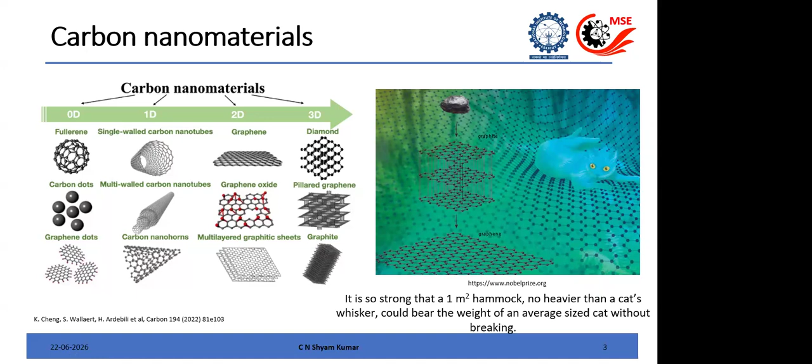We have heard about carbon nanotubes, we have heard about graphene, and then you have quantum dots. Then come the different allotropes and different forms of carbon.

Just one more thing regarding graphene before I go to the main topic. This is one of the very simple experiments that might have resulted into a Nobel Prize. They just used a Scotch tape, our normal cello tape, and a piece of graphite. The idea was that because you have the van der Waals force between the two layers, if we keep on exfoliating, we should finally end up with a single layer of graphene.

Even though there are now different ways to produce single layer graphene, like CVD, where you take a copper substrate and do chemical vapor deposition to make a single layer graphene, still for experimental purposes, people use a Scotch tape and a thick graphite flake to make graphene and do electronic measurements on that.

In fact, I had a friend who used to say, okay, my consumables are over, I need to go to a stationery shop to buy a Scotch tape. She keeps on exfoliating, and then finally transfers it to the silicon dioxide, and then they make contacts and do electrical measurements.

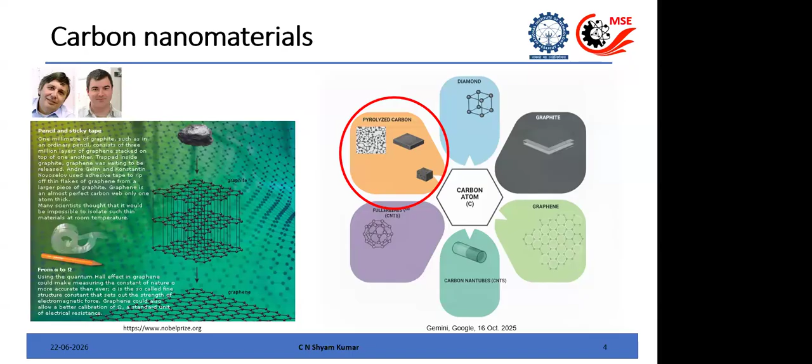Pyrolyzed carbon is now into different technological applications. It's widely used in a variety of applications like electrode materials in batteries and supercapacitors. If you know, the lithium-ion battery uses graphite.

But when it comes to post-lithium-ion batteries like sodium or potassium, the graphitic layers cannot host the bigger potassium and sodium ions. So there you need a material which is not ideally having the exact graphitic layer thickness, which is 3.34 angstrom. So you need to have a bit of disorder there, so that the layers are not perfectly graphitic, and you have more space between the layers, so that the bigger atoms can go.

This is where actually the hard carbon, they call it - it is also a pyrolyzed carbon. So hard carbon electrodes are used in battery applications, supercapacitors, and other things.

And catalyst support for chemical reactions - these are highly porous, so you have more active sites for chemical reaction, water and air purification. They're also used as reinforcements in composites, both polymer composite as well as metallic composites. This is actually biocompatible, so you can use it as implants and coatings for implants, and sensors, biosensors, drug delivery, and also thermal and corrosion resistant coatings. So there are a wide variety of technological applications where you can use this pyrolyzed carbon.

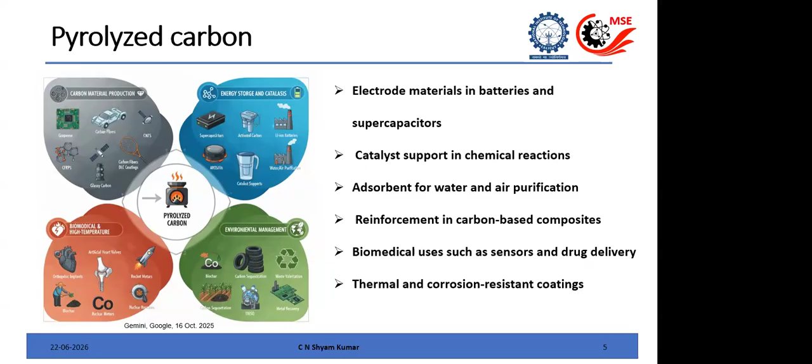And one of the advantages that makes it so popular is that you have the possibility to tune the microstructure, you have the possibility to tune the morphology, and thus you have control over the properties. So basically, you can think of a property-specific material tuned for specific applications.

So what is this pyrolysis, and what is the difference between normal burning? Because if you burn something, you also make carbon, right? But what is the difference here? Pyrolysis is basically heating without oxygen - you heat it in an inert atmosphere, or you heat it in vacuum. But when you normally burn it, you make carbon which is mostly amorphous, sp3 hybridized, and the graphitic content, that is sp2 content, is very low.

And some of the properties such as electrical conductivity, thermal conductivity, and other things are because of the sp2 nature. So you will lose all those things. And the yield is very low because you lose everything - carbon and oxygen are very good friends, so they make CO2, CO, and other volatiles will go if there is oxygen. So your yield is very low.

But in the case of pyrolysis in an inert atmosphere or in high vacuum, the carbon won't go as carbon dioxide or carbon monoxide because there is no oxygen. And if you have a precursor material with aromatic structure, these structures can freeze and form as the building block for sp2 carbon. Because if you remove all the other volatiles, the carbon ring will freeze, and these carbon rings are the building blocks for the sp2 carbon.

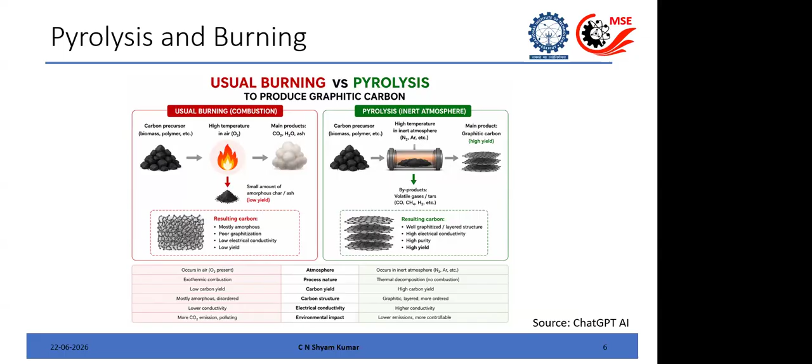So basically, you have more sp2 content. Because of that, you have enhanced conductivity. And since it is sp2, you will have a layered structure - it is not completely like graphite, we will discuss this. And the yield is high because the carbon is not going - carbon as such will stay, and the other volatiles will go. That's true, but carbon will be there, and it's more controllable - so you have the possibility to control the microstructure and morphology. So basically, yeah, this is how it happens.

It is a thermochemical decomposition, and after the initial removal of volatiles, we will see a carbonaceous backbone forming. This carbonaceous backbone means there will be some aromatic rings, or sp2 rings, which come from the aromatic molecules.

There will also be disordered carbon present. So it's a mixture in the initial stages, a mixture of sp3 and sp2 carbon with low sp2 content. As temperature increases, sp2 is a more stable form of carbon, so there will be a conversion from sp3 to sp2, and an extension of the sp2 network.

These carbons are basically called non-graphitizing carbons, in the sense that they won't finally form a layered graphite even at very high temperature, because of the initial misorientations. The layers won't completely be flat and form graphite.

There are some precursors which, if heated to very high temperature, finally end up as graphite. But in this case, it won't end up as graphite, though it will be graphitic. There's a slight difference: graphitic means it will be completely sp2, with no sp3 carbon left, but it still won't form graphite. That's why it's called non-graphitizing carbon.

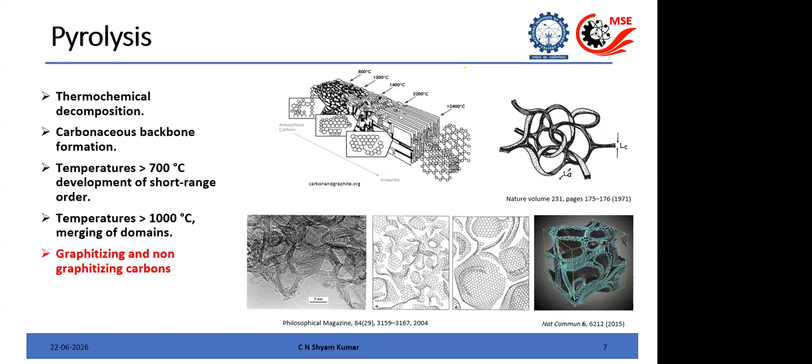As I told you, you can pyrolyze any kind of material. You can take polymers with aromatic molecules and pyrolyze them to form pyrolyzed carbon. There are groups working on engineering the polymer itself to have more graphitic content, using self-assembled monomers and such, so you have more aromatic rings, and finally you can tune the graphitic content.

But here, what we started with is looking into biomass, because biomass inherently is lignocellulose—it contains lignin, cellulose, and hemicellulose. If you take any biomass, these are the basic three constituents, and the amount of each varies. In some cases there's more lignin, in others more cellulose and hemicellulose. When it comes to lignin, lignin is the aromatic structure, so the amount of lignin decides your amount of sp2 content.

As I told you, you can take different kinds of biomass, and there is a lot of work happening in making it into different shapes—spheres, dots, fibers, sheets, hierarchical carbon—and it's being used for a lot of different applications.

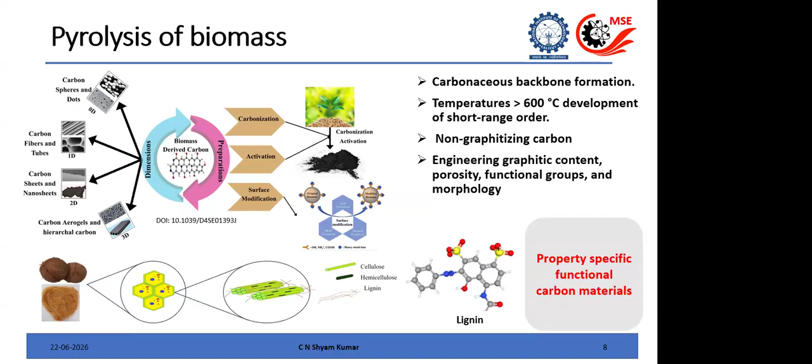So we will briefly look into how these four things can be engineered to achieve different properties, and we will discuss some applications. The whole point of this introduction is just that we have the possibility to create a property-specific functional carbon material.

Now we go to an example we all know well: coconut coir. This coconut coir is one of the lignocellulose biomasses which contains very high lignin content, so you can take that and pyrolyze it. This is an example where we took coconut coir—these are coir, not the fiber, because this is after the retting process. This is what is used for making coir, and some treatment is used to make it bit hard and strong.

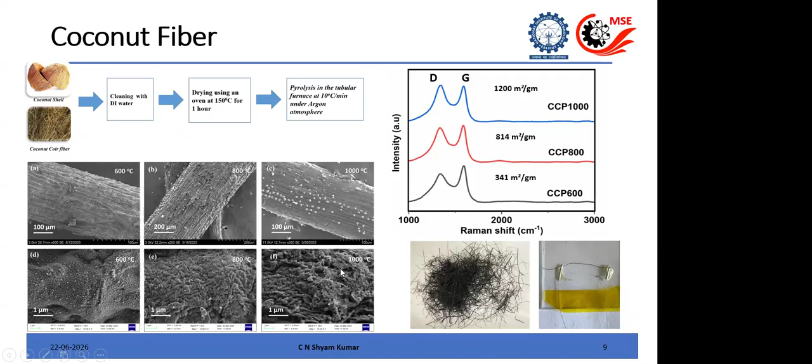Something similar you can observe with the coconut shell. Here also from Raman you can clearly see an increase in the sp2 content as you increase the temperature from 600 to 1000. You can use the D and G band to get an idea about the increase in graphitic content. And from the SEM images, you can see the porosity is increasing. So now, in a way, you have three different microstructures in both samples at 600, 800, and 1000, and the properties will change because of this microstructure and morphology.

Now the question is that, as I told, still at 1000 degrees Celsius you have, I would say, more moderately graphitic carbon. It is not yet completely graphitic. So what should we do? One possibility is that you can increase the temperature. What we want is some more possibility to tune the sp2 content so that we can have a wider window of changing the properties. So how to do that?

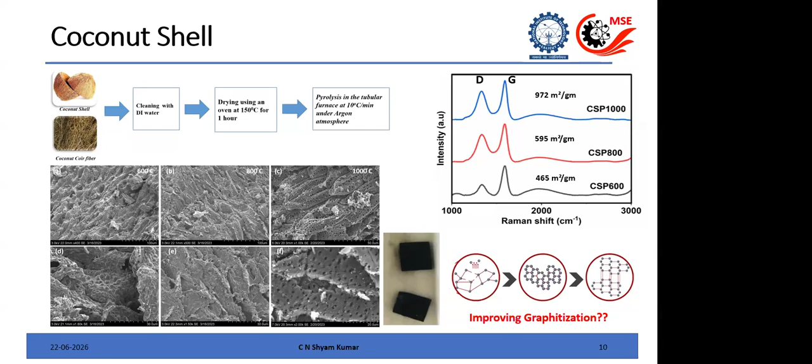So this is what we are trying to do with catalytic graphitization. Another way is that you facilitate the conversion from sp3 to sp2 through a catalyst. That way you can increase the sp2 content so you don't have to go to a very high temperature, and within our furnace itself we can do this. So this is one approach: we try to increase the graphitization by using a single step nickel nitrate solution.

So you dip your coir or even shell in a nickel nitrate solution and allow the material to soak in for maybe 8 hours or so, with continuous stirring. Then you take it out and do a pyrolysis like before. What happens is that now it's not the biomass alone, but you have nickel acting as a catalyst. What we think is that after initial carbonization, carbon acts as a reducing agent, reducing nickel nitrate to nickel, and this nickel then acts as a catalyst to improve the graphitization. Again, from the Raman data, we could understand that the graphitic content has considerably increased now, because you have the 2D peak. So now we have almost completely graphitic carbon, which is very highly conducting and more mechanically stable.

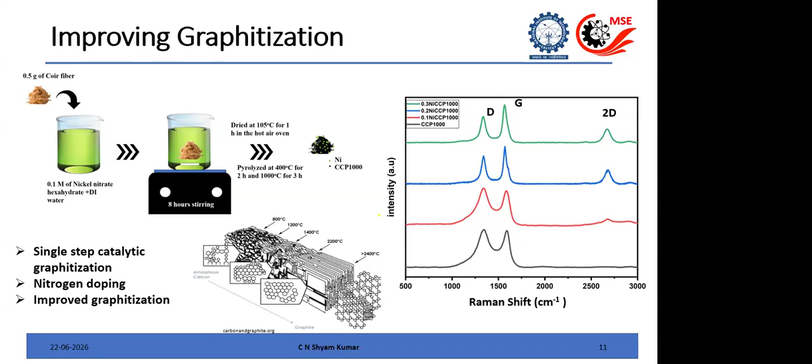And also on top of that, we have a very fine nickel particle dispersed all over the carbon. So basically you have a nickel-carbon composite with a one-step synthesis.

Till now, what we have done is try to increase, with a normal single pyrolysis, the graphite content up to 1000 degrees Celsius. But that is not sufficient all the time, so we use a catalytic method to increase the graphitization. With Raman and XRD, we could understand that it is now highly graphitic.

Now, when it comes to engineering a carbon material to tune the properties, you need a very good understanding of the microstructural evolution, how the internal structure is changing. Most of the characterization we do is actually post-mortem: you take your sample, heat it to 1000 degrees, take it out, and look at it in Raman, SEM, or TEM.

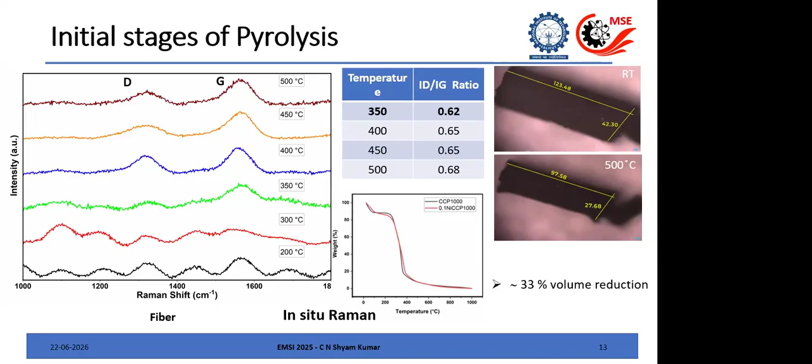You can also look at the shrinkage, because when the volatiles are removing, there will be a change in the size of the sample. You can see the maximum change is happening somewhere between 300 to 350 degrees Celsius, coming down from 120 micrometers to 100 micrometers. So you can correlate this - all these insights will help you tune it better.

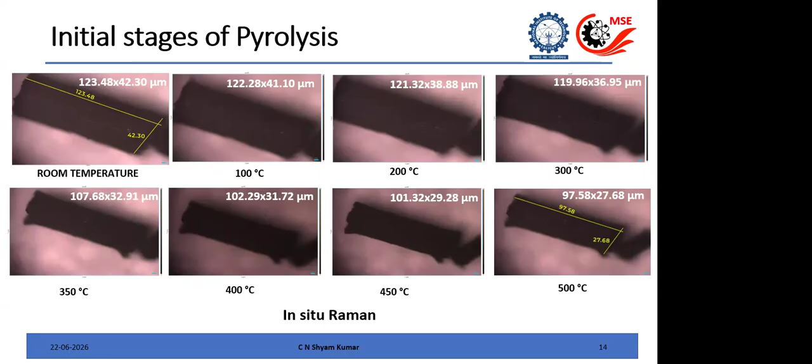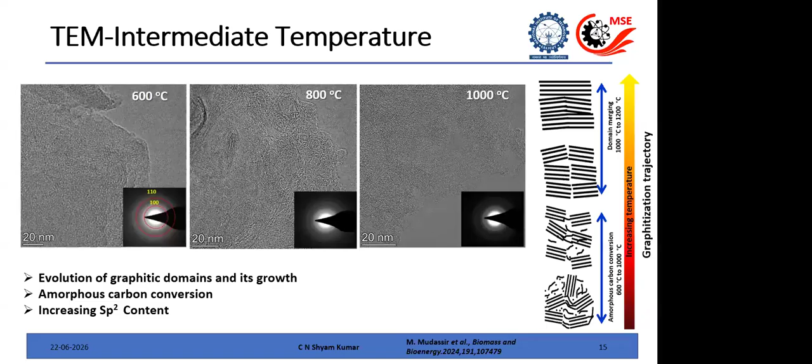So now you know that there is a higher amount of sp2 at 1000 degrees Celsius, and the sample is almost a flaky graphitic structure. So this is okay, just with the normal samples.

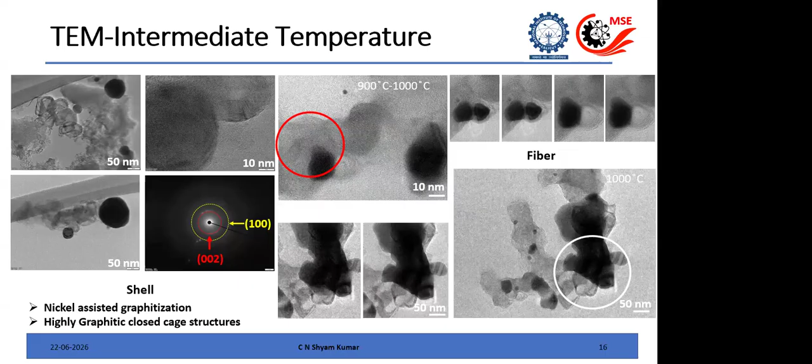Now, with this understanding of the microstructural evolution, we look at three examples of using this biomass-derived carbon for different applications.

So here you also have the possibility to change your biomass, and that can yield another kind of carbon with different morphology, different porosity, different functional groups, as well as different graphitic content. You need to keep in mind that with different biomass, the final carbon will be different.

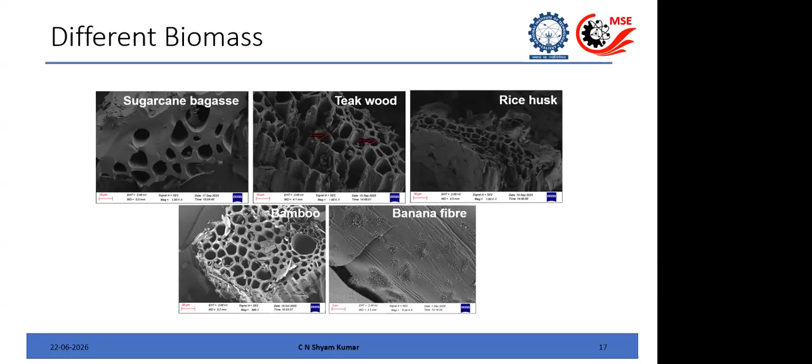Now, examples. So now we move on to properties. This pyrolyzed carbon, which is from the coconut coir, is inherently piezo-resistive, changing its resistance with force. And since these are mechanically stable, we could look into the piezo-resistive property of a single fiber. So this is that example.

And one thing to keep in mind is the trend that we observe: as the pyrolysis temperature is increasing, the piezo-resistive sensitivity is coming down.

That means the sample pyrolyzed at 600 degrees Celsius is more piezo-resistive than the sample pyrolyzed at 1000 degrees Celsius. Even though the graphitic content is increasing, the conductivity is increasing. From Raman, we could see that the graphitic sp2 content is increasing, but the piezo-resistive response is coming down.

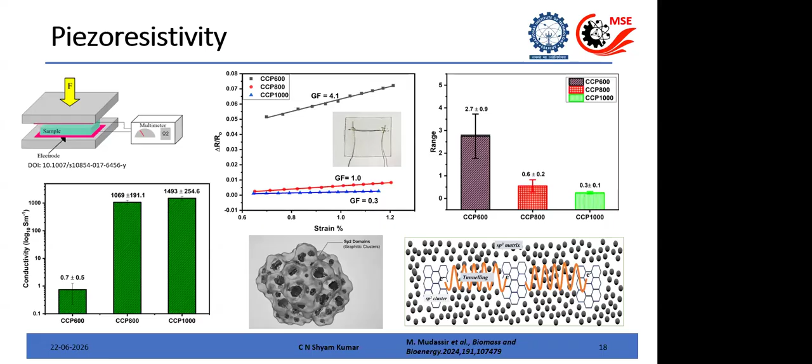Now you can actually make this not as a single fiber. You can powder it and make sensors out of it. What you see in the figure is a small sensor formed by this powder, powdered with a ball mill. This is a very simple design.

You have a substrate, like a PET substrate or some flexible substrate. Then you put a double-sided tape on that. Then you spread this CCP 600, a sample pyrolyzed at 600 degrees Celsius. Then you connect it with two copper wires, and on top you put adhesive to protect the powder.

We use Fevicol, so maybe we can think of something like a 10 rupee sensor. And this sensor works, and the trend is the same. As you use different powders pyrolyzed at different temperatures, you have a decrease in the piezoresistive response. This is actually a prototype which has been working for the last maybe 1.5 years or so.

This means these sensors are durable, and you can use them for motion sensing. It can also sense air flow, and you can use this as touch sensors, movement sensors, and other things, and it is actually durable. It is, I think, more than 10,000 cycles sustained without any changes.

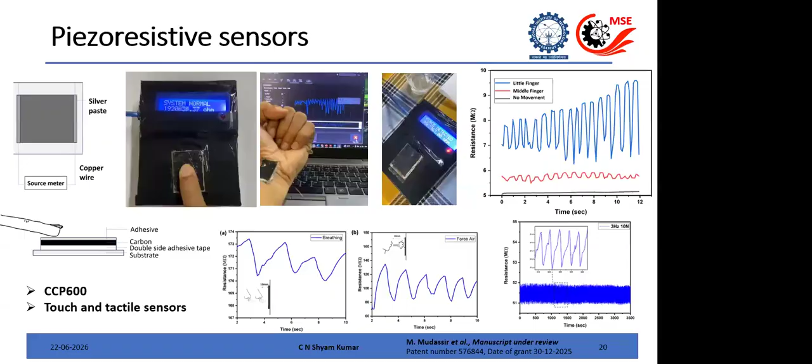So here you can use this powder to make sensors, and you can tune the sensitivity. That is the point - you can tune the gauge factor, which is the sensitivity, by changing the pyrolysis temperature. You might not always want a very highly sensitive sensor. By changing the pyrolysis temperature, you have a change in the piezo-resistive response, and you can have a sensor with tuned sensitivity.

Now this is one thing. Another thing is shielding - EMI shielding. Electromagnetic interference is a big problem, so people are coming up with different materials for electromagnetic shielding. Metals have been used, but the problem with metals is that it is heavy and other things. Another possibility - people started using biomass-derived carbon.

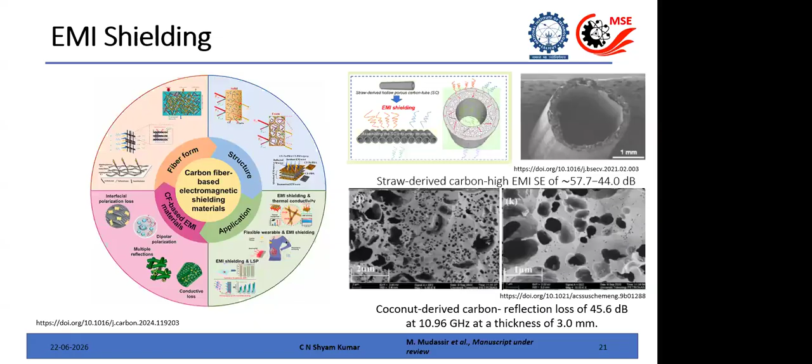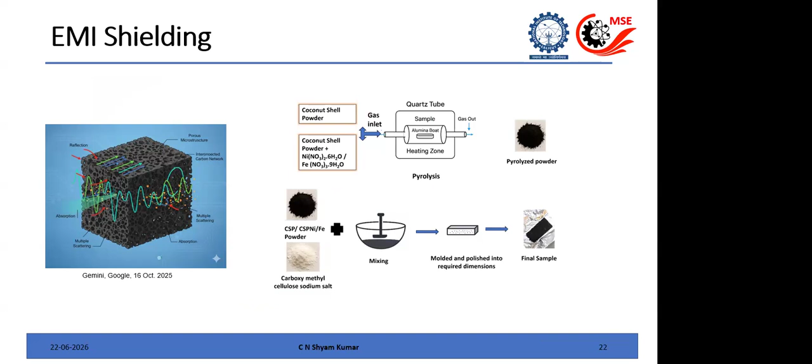There are some works on straw-derived carbon and others. We used coconut shell to see whether it has some inherent electromagnetic shielding. We make small pellets out of it with some binder, and this is the sample which is dispersed with nickel.

So here we increase the graphitic content. We had the non-catalytic samples also, but we also improved the graphitic content by adding both iron nitrate and nickel nitrate. Here the thing is that you are increasing the graphitic content as well as dispersing some nanoparticles, because these kinds of metal nanoparticles will help in enhancing the EMI shielding.

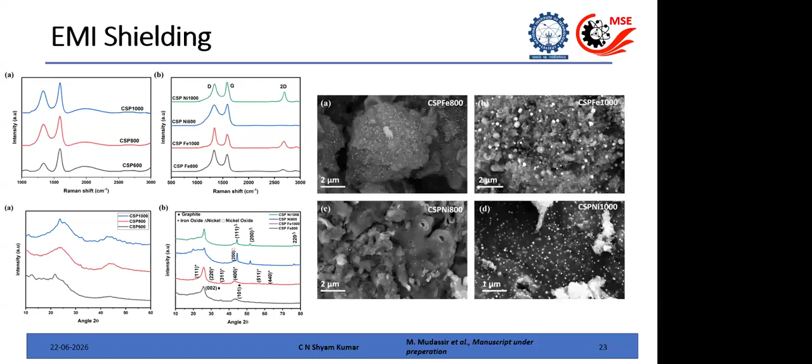And here the trend is reverse. Here, if you increase the graphitization temperature from 600 to 1000, you have an improvement in the EMI shielding, because now it is becoming more conducting, and the porosity is increasing. So you will have local internal reflections and all, which improve the EMI shielding. And if you increase it further with catalyst, you increase the EMI shielding.

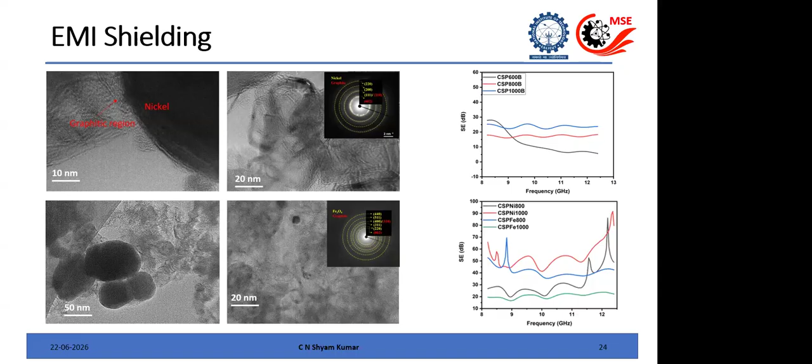Now, one more thing with a slightly different response is a relatively new field called hydrovoltaics. Hydrovoltaics is basically when flowing water is in contact with carbon, there can be an electrical double layer formation. The water interacts with the ions on the surface of the carbon, and there is an ionic movement of ions in the direction of the water flow, along with a movement of electrons through the carbon.

And basically, you can produce power by just flowing water across the carbon. Here, three things are important. One is the surface area of the carbon - more surface area means more interaction and more possibility of forming the double layer. Second is the conductivity of the carbon, because it has to conduct the electrons, so it has to be more conducting. Third is the availability of surface functional groups to interact with the water.

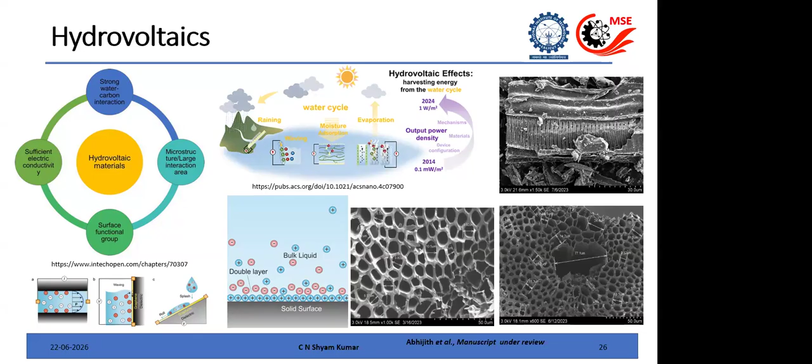So we tried this with coconut coir, because we know that it is highly porous and has a moderate conductivity, not too high, but decent, since we had tested it previously. So we made a sample, which is this next one.

The sample is very simple. You take a tube, fill it with carbon powder, and put a cotton wick below, because the whole thing works like this: the water will evaporate through the carbon powder in the tube, which is filled with carbon, and you put it in water so that the water evaporates through the carbon, creating a flow which produces some voltage and current. This video shows a small sample giving almost 1 volt and about 0.2 milliamps, or 200 microamps of current, with just a small sample and nothing else, simply by evaporation.

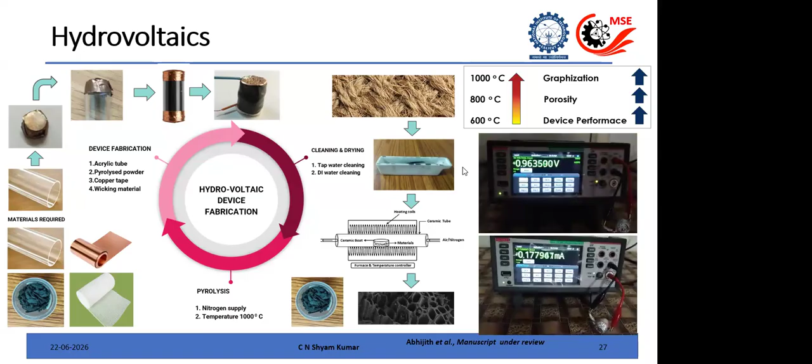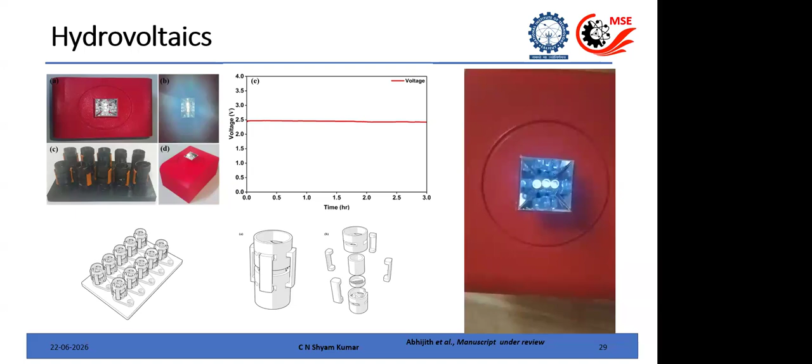Now all these things will just take maybe 5-10 minutes. So this is all what we have seen, how you engineer the carbon with pyrolysis.

Whatever we have seen is conventional pyrolysis, where you just keep it inside and give some inert atmosphere and heat, which is power intensive. So even though the source is biomass and sustainable, the process itself is not sustainable.

So people have started thinking of non-conventional processes to make these kinds of carbons. One is laser induced graphitization, where you use laser to graphitize polymers as well as biomass into highly graphitic carbon within a very short time because it is fast.

There's also something called flash joule heating, where you give very high power and high voltage for a very short time and convert these things into highly graphitic carbon. People have also used microwave pyrolysis, since carbon is microwave active, so you can heat carbon with microwave.

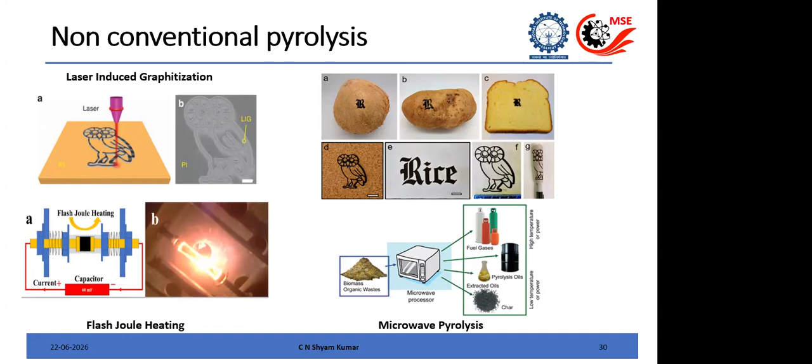Some examples, then I think we'll stop. We actually use this kind of laser module. This is a normal laser engraver that you can buy these days from Amazon and such. You have a laser, and you can graphitize some polymers.

One example is polyimide. You can take this polyimide, which is also called Kapton tape. These are examples of the graphitic carbon which you get with laser graphitization.

The main difference with conventional pyrolysis is that these carbons are highly graphitic because of the photothermal interactions with the laser. This becomes highly graphitic in a very short time.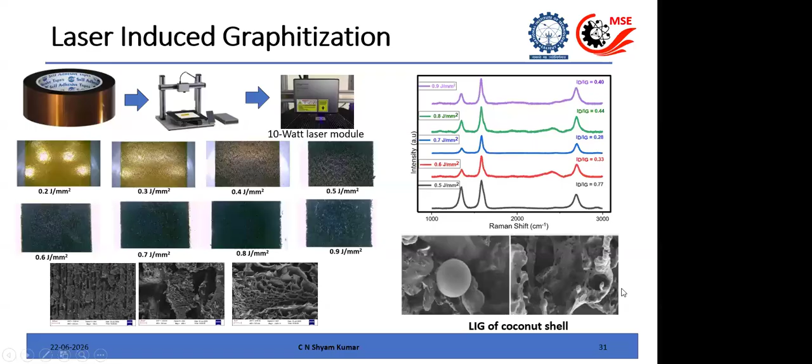You can also do the similar thing with coconut or biomass. There are works on this. One good thing with the laser is that you can selectively graphitize because of the movement, since these systems always come with a movable stage with precision.

I think you might have seen this same technology used to make photos and laser engraved photos. You can put a design and basically carbonize or graphitize, I would say, in a specific pattern that you want.

This is one of the things we do here recently, making all-carbon microheaters. You can graphitize in a specific pattern, and use that, because once the carbon is made, it is conducting, and you can do resistive heating.

As I mentioned, carbon is very stable in inert atmosphere at very high temperature, so you can reach very high temperatures. I think we have crossed even that.

Now these kinds of small heaters reach around 1200 degrees Celsius in inert atmosphere and almost 650 degrees Celsius in open atmosphere.

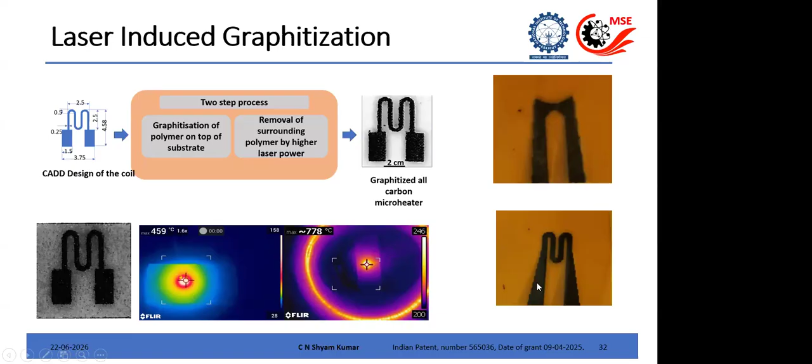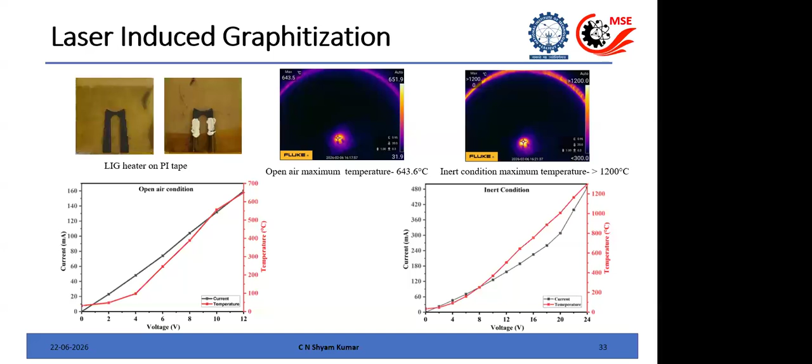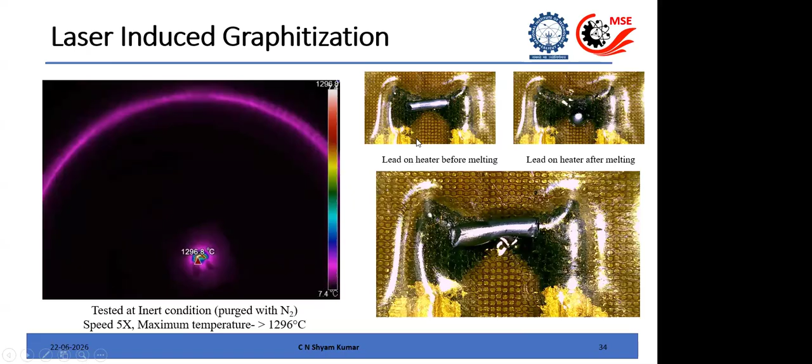This is a video which shows that it is reaching around 1300 degrees Celsius with the thermal camera. This is a lead strip which is on top of the heater, and we can see that the heating is very fast, and then it is melting.

So you have the possibility. I just showed this to let you know about two things. One is that you have non-conventional processes which can be used to make highly graphitic carbon, and one of this is laser-induced graphitization, which can actually precisely pattern polymers, or you can make carbon patterns. That is an interesting thing, and it is fast and precise, so that you can make heaters and others.

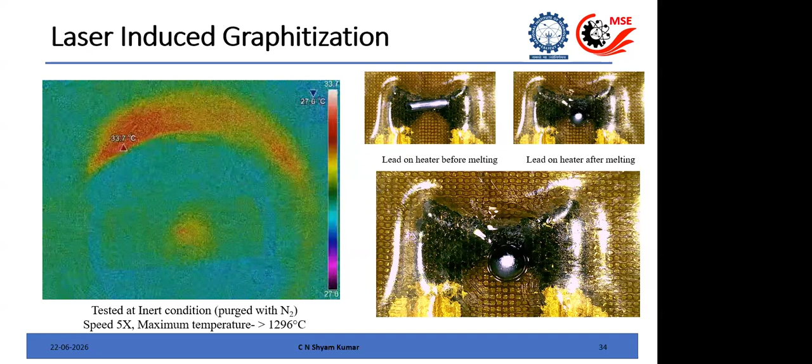And these carbons can be used not only for heaters, but you can actually change the surface properties by changing the laser parameters. So you can see this is a super hydrophobic surface which is formed by laser graphitization, and then you can tune the contact angle by changing the laser parameters.

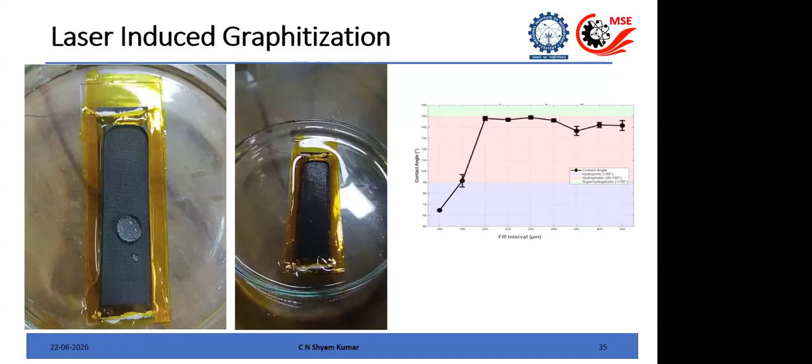Some examples are not only limited to just graphitization, but also you can use it to optimize different properties. I just want to introduce this synthesis also, which is called flash synthesis of graphene. I have a video from Rice University.

So what they do is, are you able to hear the audio? No, sir. Okay, then leave it.

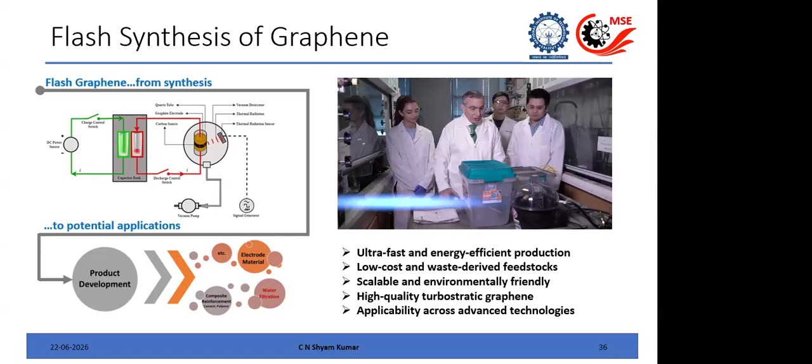So what they do is, they actually take conducting, initially pyrolyzed carbon from any biomass or anything, or mix it with some conducting fillers, and they give very high voltage and very high current for a very short time. So, like in the case of laser, you have a very fast conversion of this organic material to highly graphitic carbon.

I think there is a small video where you can see this is the carbon inside. You can't flash biomass as such, because there should be some kind of conductivity associated with it. So either you mix it with some conductive carbon, or you initially carbonize it to some extent and then do this, and then you can give very high current and voltage.

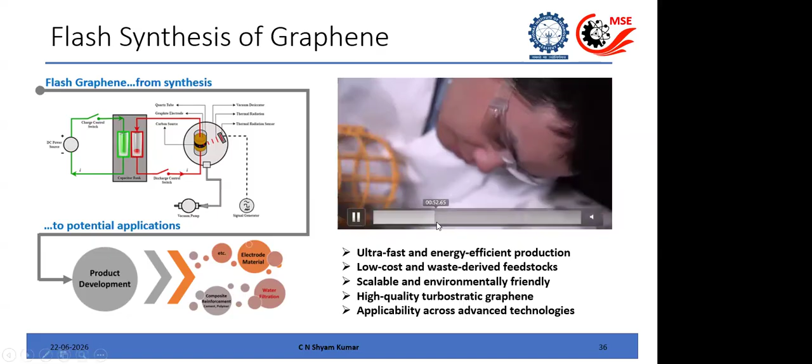And you can see that. So this is why it is called flash synthesis. The good thing is that this carbon is actually highly graphitic.

It's ultra fast, energy efficient production, and very low cost. And you can use basically any kind of waste derived feedstock. It is scalable. You can have gram scale synthesis of moderately good graphene, I would say, because making graphene at gram scale is a really challenging thing.

There are videos where they automate it to make it continuous and all, producing high quality turbostratic graphene. So you can apply it across advanced technologies.

So the last point I just want to convey to you is that it is not only the normal pyrolysis which is being carried out. People are coming up with new ways to convert this waste and biomass.

They have done a lot of things, I think. They have flashed a lot of things about all biomass, human hair, all those things. I think they have tried and assessed the quality of the graphene. But basically, you have processes where you can actually use these kinds of non-conventional pyrolysis to come up with highly graphitic carbon.

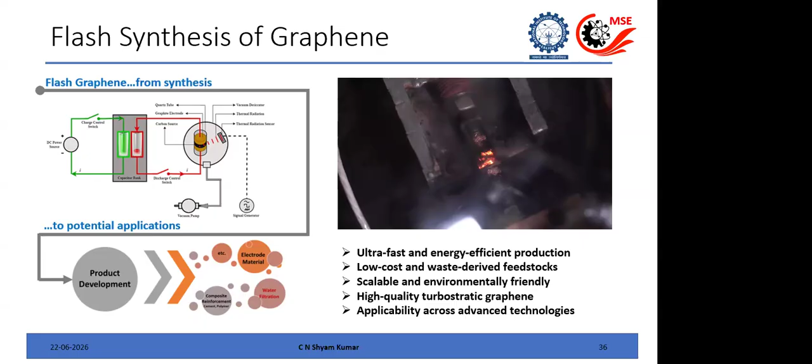Again, these are all tunable. You can tune the properties with the process parameters. You can tune the microstructure with process parameters, and because of that, you can tune the properties with the process parameters. So yeah, I think I'll stop here.

Pyrolysis offers a green circular approach, and pyrolyzed carbon exhibits tunable properties. It can be used in a variety of different applications. But the problem with this is process optimization. So a lot of people started looking into how to make the process more efficient.

As I told you, if you heat your sample in a furnace for 10 hours and then make some carbon, that doesn't make much sense because the whole process is not energy efficient, and the carbon footprint you leave is far more than what you can save by using that carbon in different applications. So you have to start tuning it.

Understanding the process more will help you tune the properties for multi-functional, super performing materials like this turbostratic carbon made from flash, whose properties are very close to graphene, I would say.

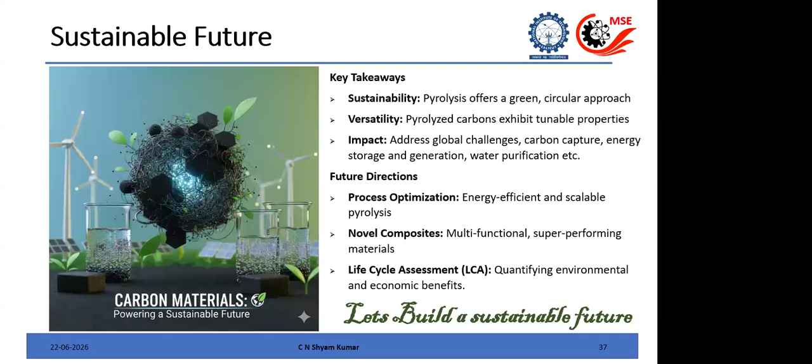We should start seriously thinking about life cycle assessment and quantifying the environmental and economic benefits of this kind of carbon. That will help have some sustainable way to mass produce these things, and hopefully we could see more of this kind of sustainable carbon in the future.

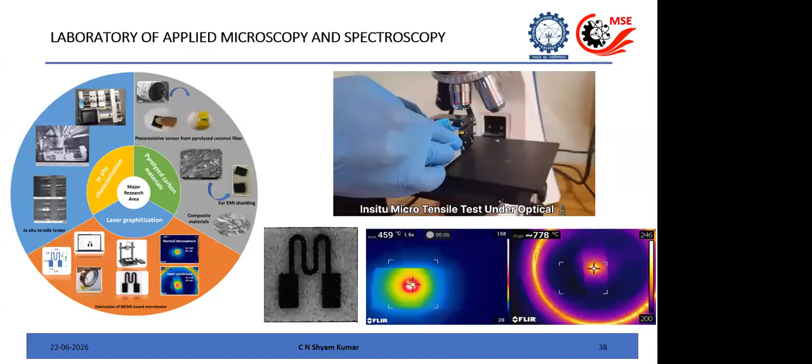Just before we stop, we are from what we call ourselves the Laboratory of Applied Microscopy and Spectroscopy. We do research in carbon as well as some method development. We are always open for any kind of collaborations, and you can visit our lab. You're always welcome, and you can encourage your students to take up internships and all.

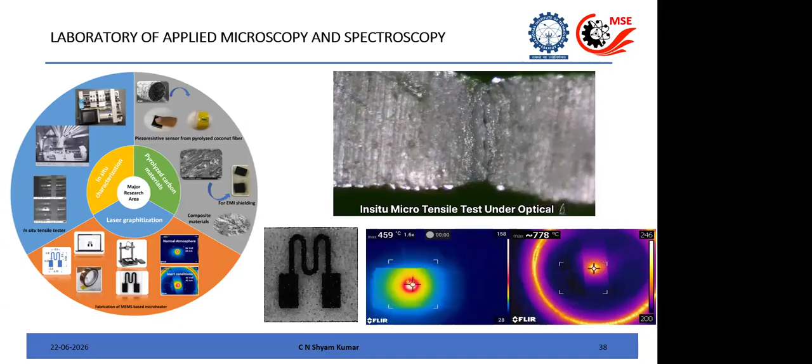NIT has an official internship call every year during this time, through the CCD, and otherwise also we host a lot of very good internship students. You're also welcome. And if you don't know, the material science department has an MTech in material science and engineering, with both gate entry and non-gate entry. If some of your final year students are interested, I think the first phase is over now, but there will definitely be some spot admissions, so ask them to keep watching.

I couldn't stop without thanking all these people, because I usually don't do any experiments these days. I take their results and present them to you. So whatever I've discussed is from these people, the collaborators, and the funding agencies which helped with the facilities and funding. Thank you, and thank you all for the patient hearing. I'll be happy to have further discussions.